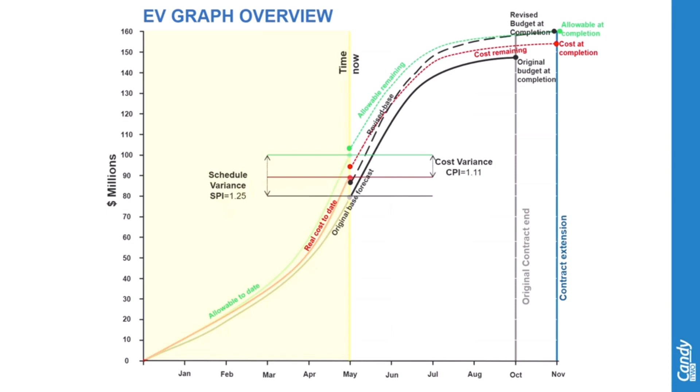To ensure that the required indicators and analysis information retain their integrity as a useful management tool, we must ensure that all sources of required information are checked and analyzed to ensure that they are at the required level of accuracy and that they run in parallel to eliminate time lag adjustments that compromise the information's integrity. In order for us to achieve the following earned value graph, we need to begin with establishing the base.

The original base forecast is the planned project value over the project duration. In order to plot the original base in Candy, we need to complete the following steps.

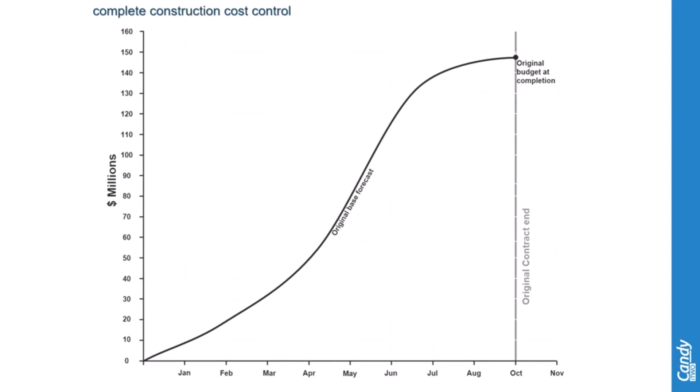Firstly, we are going to be discussing post-tender preparation and value re-engineering. This is the process of improving the value of a project by assessing each element of the project and the respective cost associated with the item.

The estimate created by the tender department in Candy Estimating can now be used for on-site project control. In this process, we are able to assess the estimate and adjust the rates to reflect the re-engineered, remodeled costs.

When we begin the post-tender and re-engineering process, there is a checklist that we look into. This is referred to as the post-tender checklist. The first step is to copy the job.

Once we have done that, we would then clean the job of unused items. We then can set the selling rates and preserve the bid rates and quantities. Once we have preserved the bid rates and quantities, we can begin to remodel the job so that we can reflect the current view of the project.

We can set our provisional final quantities and ensure that our resources and bill items have been allocated cost and task codes, before finally assessing our worksheets and resources through our reports by looking at the pricing check, worksheet calculation line check, provisional listing, and resource check. Let's begin to look at all of these steps in further detail.

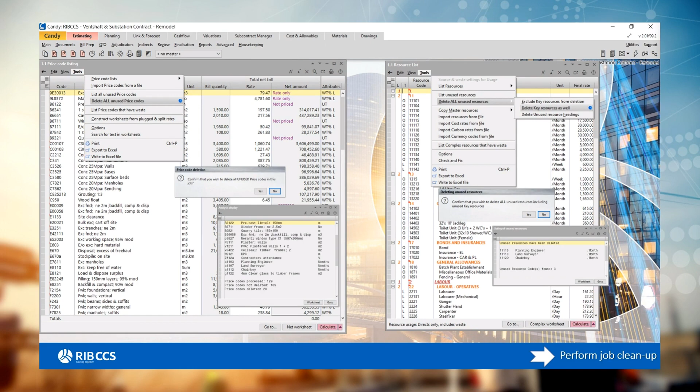Deleting unused price codes will result in having less price codes to check. The job will therefore only contain price codes used in the bill. To delete unused price codes, open the price code listing, select Tools, and delete all unused price codes, and select Yes to confirm. This will remove all price codes that have not been made use of in the bill.

Similarly, unused resources can also be deleted. This step can only be done after the unused price codes have been deleted, for the reason that price codes use resources, and therefore you cannot delete the resource while they are in use. To delete unused resources, open the resource list, select Tools, delete all unused resources, delete key resources as well, and select Yes to confirm. This will remove all resources that were not used in pricing the bill.

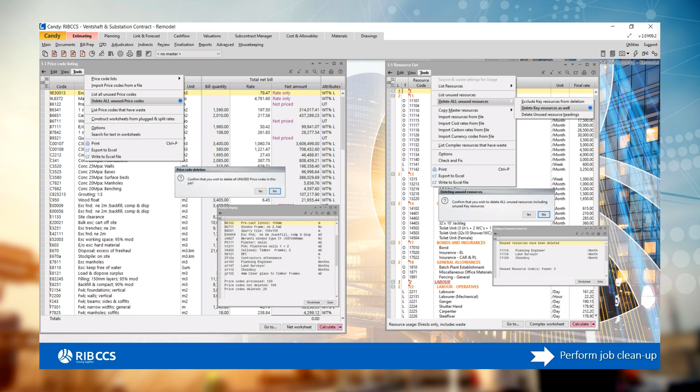The third check on the checklist is to copy the selling rate. The selling rate is used as the contractual rate for printing the interim payment claim to the client. The selling rates and amounts should balance with the signed tender document.

The gross rate is not ideal for post-tender stage because any changes made on the net rate through job remodeling will change the gross rate. Adjusting the net rate or applied markup will not affect the selling rates and is therefore ideal for post-tender stage.

The selling rate is entered manually or can be copied from the gross rate. A calculated markup column is available and calculates the difference between the selling and the net rate. At tender stage, the job was priced and the markup was applied. The selling rates can now be established by copying the gross rate prior to making any changes or remodeling.

To copy the selling rates, right-click in the selling rate column. Select Copy Selling Rates from Gross, tick to lock the selling rates after the copy, and select OK to confirm. This will copy the selling rates from gross and lock it from any changes.

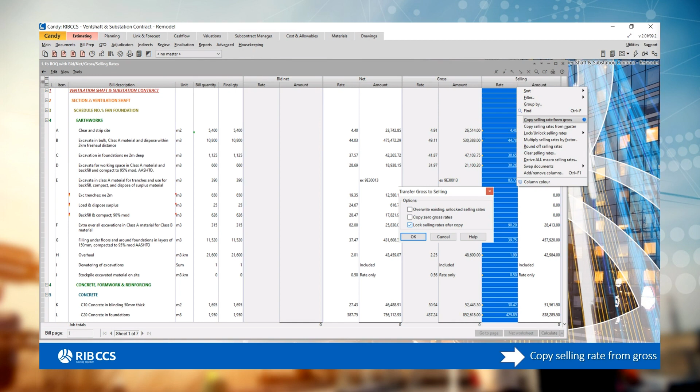The next step on our checklist is to preserve the bid rates and the quantities. A record of bid rates and quantities can be stored. These bid values can be used for comparison against remodeled rates and quantities. Once you have preserved the bid rates and quantities, you can change the net worksheets to reflect the current view of the project, also known as job remodeling.

To preserve the bid rates and quantities, right-click in the bid net rate column. Select Preserve all bid rates and quantities and click Yes to confirm. This will keep a record of the net rates and quantities as estimated.

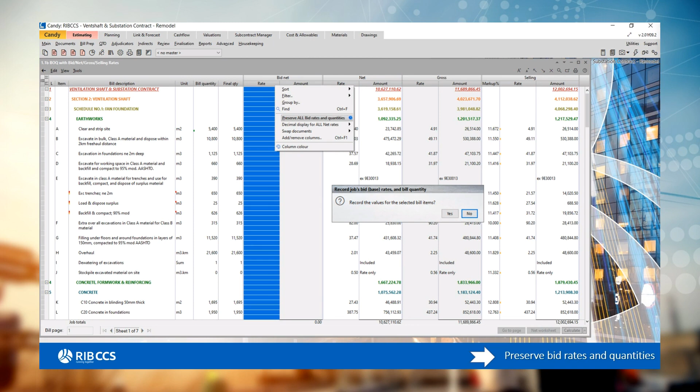Once we have set our selling rates and preserved our bid, we can begin to job remodel. Job remodeling is done by assessing each element of the project and the respective costs associated with it. The site team can now revisit each of the worksheets and adjust the productions to what they will achieve on site. Better buying, better subcontractor rates are considered, and the site team may agree on the production in the worksheets and revisit the construction methods used.

By doing this, the site team takes ownership of the project budget and can manage the productivity by using alternative construction methods for improved financial control on the project. On this job, we are able to see that item L, C20 concrete in foundations, is priced at 387.75 and a markup percentage of 12.76. The rate for river sand, which is used to price item L C20 concrete in foundations, is currently at 68 per meter cubed.

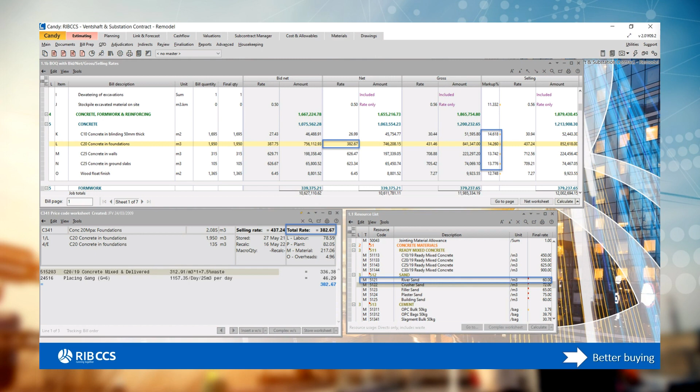To do this, simply open the resource list and change the rate for river sand by typing 60 in the final rate column. This has an effect on the net rate for item L, C20 concrete in foundations, decreasing the rate from 387.75 to 382.67, and a markup percentage increase from 12.76 to 14.26. Job remodeling allows us to manage the project budget and improve the financial control.

The next step on the checklist is to set final quantities. The bill quantity will normally be used for the first final value projection and as a starting point. It is best to do this before entering any valuation quantities. To copy final quantities, right-click in the final quantity column. Select Copy Final Quantities from Bill and select Yes to confirm.

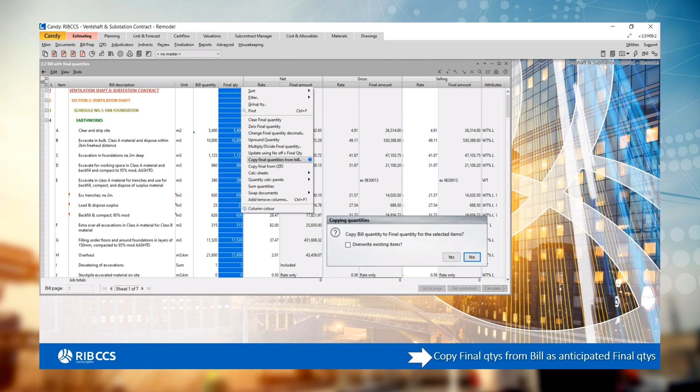The final quantities can be adjusted and recorded as they are remeasured. Once you have remeasured the final quantities, simply type the remeasured quantity into the final quantity column. For item A, clear and strip site, we have remeasured the final quantity to 6,000 square meters.

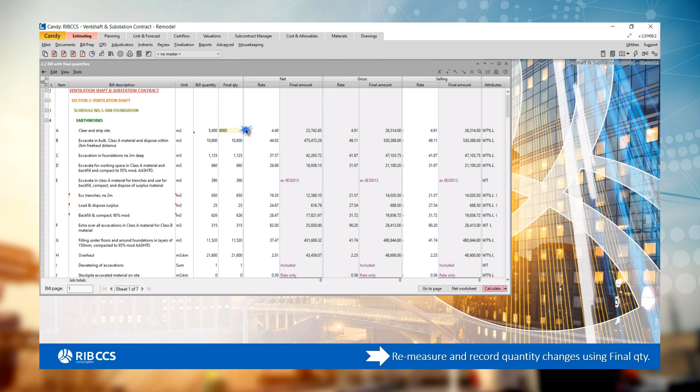Next, we can allocate cost codes. The cost code, also referred to as the ledger code, is used to summarize resources. The cost code provides resource-based control for managing fixed resources such as material. At post-tender stage, the allowable to date in Candy can be reconciled to the costs to date in accounts. It is therefore important to have the cost code in Candy matching the accounting ledger code.

Since complex resources are combinations of simple resources and complexes, we only allocate cost codes to simple resources. To allocate a cost code on the resource list, double-click in the cost code column in line with the resource you would like to allocate, and select the relevant cost code from the pop-up list. In this job, we are allocating cost code 910002 General Labor to resource 22602 Fitter Grade 2.

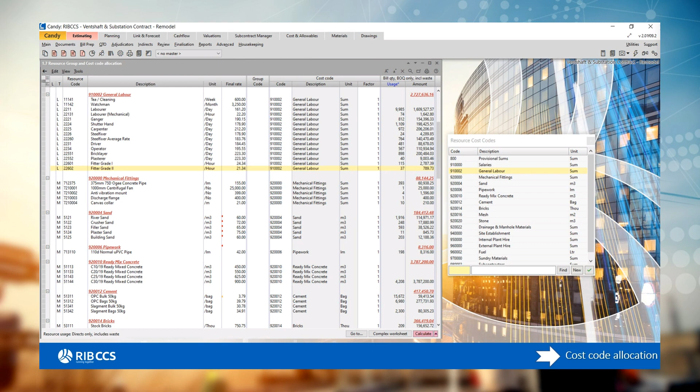Similarly, we can allocate task codes. Since the cost code provides limited control to productive resources such as plant and labor, the engineering site staff will require the labor and plant allowable in more detail, typically the allowable per task on site.

The task code is used to implement functional control on the job and summarizes bill items into categories of function or activity. The key is to summarize items with similar production. By summarizing items with similar production, we are summarizing items with similar resources and therefore similar cost sensitivity.

Candy provides a simple method of summarizing the bill items into tasks. The allowable for each bill item is broken down into the various resource types. So we immediately have the labor and plant allowable for each task, the exact information required to control the productive resource. If our machine is not being used effectively, it is costing a lot more than if our labor is not being productive. We would have different controls on our plant versus our labor.

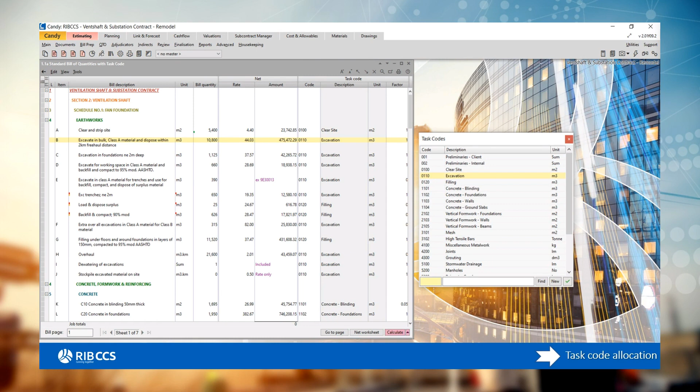To allocate a task code, on the bill, double-click in the task code column in line with the bill item you would like to allocate, and select the relevant task code from the pop-up list. In this job, we are allocating task code 0110 excavation to bill item B, excavate in bulk, class A material, and dispose within 2 kilometers free haul distance.

Now that we have completed the items on our checklist, there are further reports that could assist to ensure that we have correctly assessed our job. The first report is the pricing check. We are able to customize this report to view the codes we would like to search for, like items with 0 rates or items with no selling rate. For the purpose of post-tender, we are looking for items priced in plug and split rate mode.

To conduct this check, in the Estimating tab, click on Review, select Pricing Check, and select Price Codes on the Direct Cost Bill pages, and include codes priced in plug mode and priced in split mode. The report found no items in the job.

However, if an item was priced in either method, the report would identify this item and the page number, the item number, the code, the description, quantity, and rate, as well as a comment to identify if it was priced in plug or split mode, thus allowing you to quickly identify the items and correct them.

The next report is the worksheet calculation line check. In the Estimating tab, click on Review, select Worksheet Calculation Line Check, and click on OK to run the report. This job has found no errors on the worksheet calculation lines. However, this check will highlight potential errors found on the worksheet calculation lines, identifying errors with variables, typing errors using the letter O instead of the number 0, as well as errors in the syntax for percentage waste.

Another report check we can do is a resource percentage check on our key resources. This report allows us to see the utilization, rate, amount, and percentage usage per resource type, and the overall percentage usage on the project. In the Estimating Report Manager, select the report resource percentage, select final quantity, and sort by resource type and on simple resources only. Click on OK and preview the report.

We are able to see for material resource 51144 C30/19 ready mix concrete. This material resource constitutes 61.45% of the overall material usage on the project and 35.60% of the overall resource on the project.

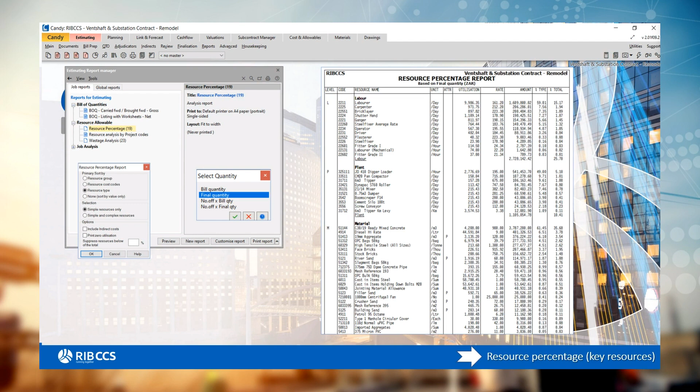Now that we have completed our post-tender checklist, we can start looking at the contractual program. A contractual program helps with the coordination of the activities to be completed in order to successfully complete a project. Candy's planning application, also known as SitePlan, is much more than just a scheduling system for drawing programs. It is a simple yet powerful critical path networking and project control system designed for construction projects. It can be used effectively by a non-planner, but has all the features, functionality, and sophistication required by a professional.

The first step is to create a project program. As a contract may consist of many programs, sub-programs, and section programs, the program manager is used to create, structure, and manage your programs easily. To create a program, click on the Program Manager and select New. In this job, we have created the program called Contractual Program. Double-click to select it.

Once we have selected our program, we can define the calendar. Calendars are used to store daily information and to specify non-working days and working day patterns for the project. In the calendar setup, we are able to add notes on a daily notepad as well as the daily diary. A total of 9 calendars may be created in SitePlan. This means that if you have a 6D or 6-day calendar, you can allocate the calendar to an activity that works 6 days. The program calendar can be viewed in a daily, monthly, and yearly view.

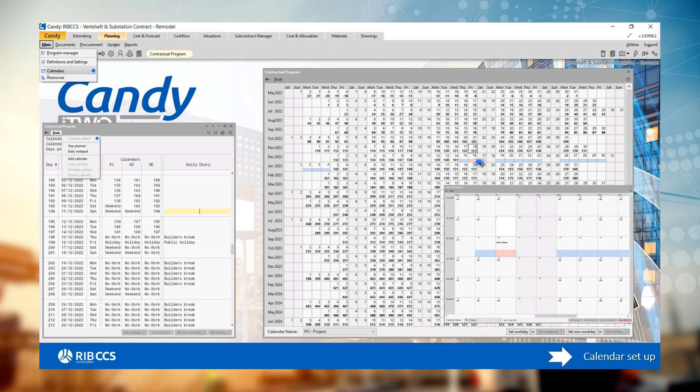Once we have defined our calendar, we can open our standard bar chart. This document has been customized to view the activity information, duration of the activity, as well as the successor details. The right-hand side of the document is where our bar chart information will be displayed. Since this is a program we are creating from scratch, we need to fill out the activity descriptions based on the activities we are planning to complete for the project to be a success.

We are able to add activities simply by typing in the description of the activity into the description column. We can add headings and subheadings to summarize activities in a work breakdown structure by simply adding the heading level number in the T column. In this program, the fan foundation is the main heading with subheadings Earthworks, Foundations, Superstructure, Stormwater Drainage, and Fan Installation. Each subheading is broken down into the individual activities required to be completed. These activities can now be allocated a duration and linked based on their precedence network.

To allocate duration to an activity, we can simply type in the duration column or use our mouse pointer in the bar chart window and drag a bar to the desired duration. For this project, we are able to see that Clear Site has a duration of 20 days, and the fan base walls in the superstructure is being allocated a duration of 30 days.

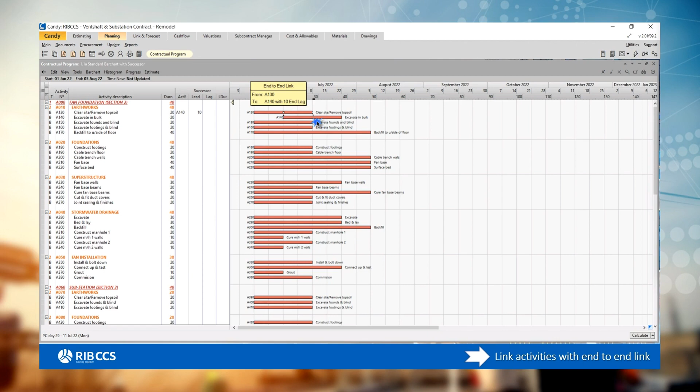Activities can also be linked using the successor columns. This is done by typing in the successor activity number into the current activity number column. Here, we can see the successor activity number A150, Excavate in Founds and Blind, is entered into the current activity number column, A140, which is Excavate in Bulk. We are then able to allocate the lead and lag, respectively.

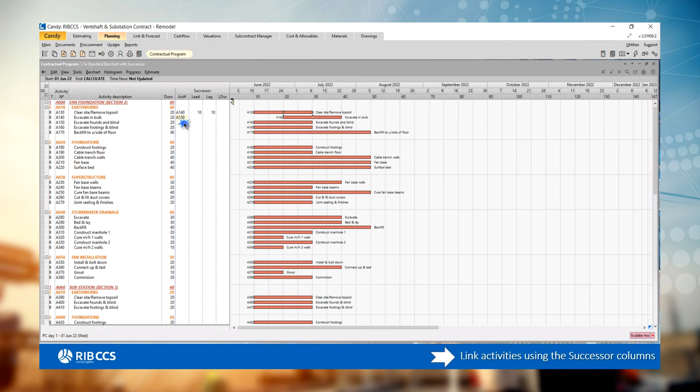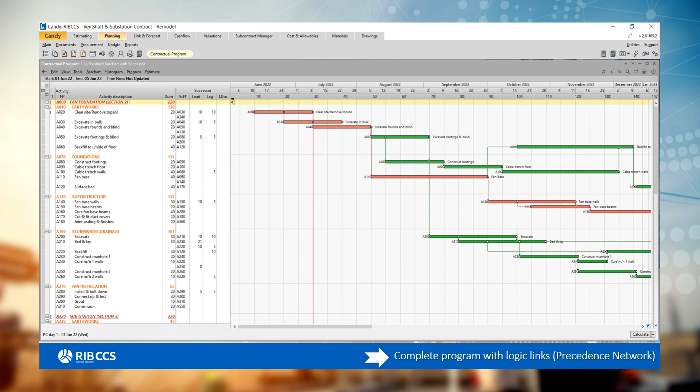Once you have completed linking the activities based on your preferred method, we are able to view our project program fully linked. The red bars indicate activities on the critical path, and green bars indicate activities with float. The program is now complete. However, in addition under planning, we have items such as long lead and information schedules. We can add a legend to be viewed on the bar chart. We can add timelines to indicate our seasons, as well as add imposed dates such as the contractual end date.

Once we have set our contractual program, and in order for us to analyze and manage the expected cost of the project, we need to link the bill to the program. We have created our bill, completed our remodeling as well as the post-tender checks. We have created our program from scratch and established the relationship between the activities. We are now able to move on to linking the bill of quantities and the program. When it comes to linking the estimate and the program, there are three methods of linking the BOQ to the program in Candy.

Method number 1, creating a program from the estimate. In this instance, we don't have a project program and only have a bill of quantities. We can then create the program from the bill. The advantage of using this method is that it is a quick and fairly accurate budget forecast, which is done by the estimator. Bill items are automatically linked to activities, and it is suited for civil work bills that are more activity-based. In order to link the bill to the program using this method, we take the following steps.

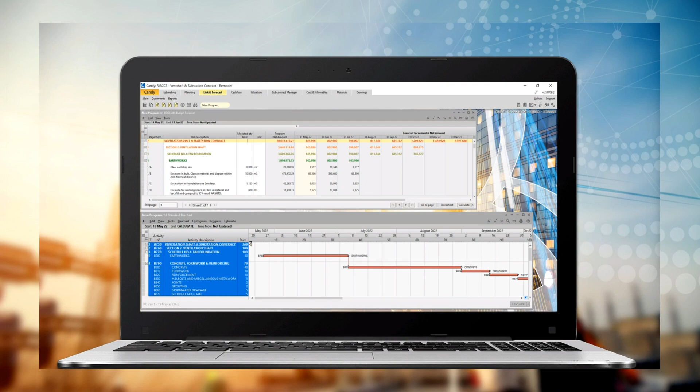Now, we are able to see our budget forecast for each bill item for each month of the project's duration. We are able to see at the very top that we have a budget forecast of 145,996 for May, 803,980 for June, and so on. We are also able to see it broken down to each bill item to see the budget forecast on the specific bill item spread over its duration.

Method 2. Linking the estimate items to the program activities. In this instance, we have a bill of quantities completed as well as a program which was manually developed. The advantages of this method are it produces the most accurate budget forecast, bill items contribute both monetary and resource values on the budget forecast, and program activities contribute duration and sequence of the budget forecast. This method is easy but is very time consuming. To link the bill to the program using this method, we take the following steps.

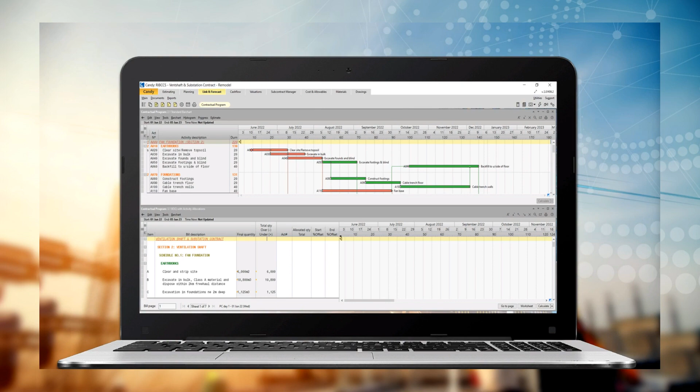We can now access our bill of quantities with activity allocation under the Link and Forecast tab. We can size the forecast document to the bottom of the screen and the project program to the top. The bill of quantities with activity allocation document is simply a BOQ with a bar chart window as well. We can now begin to manually link the bill of quantities and the program.

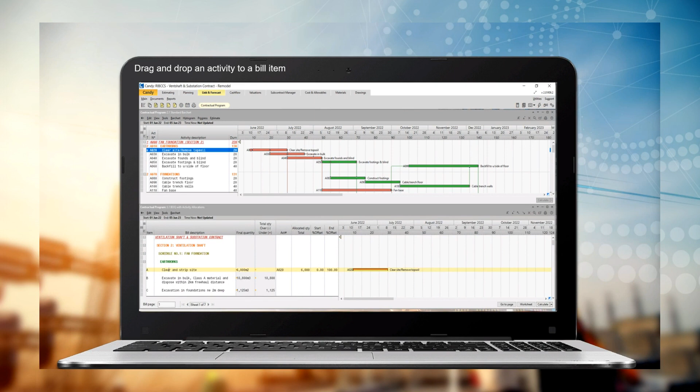The first way to link activities and bill items is by dragging and dropping an activity to a bill item. On the standard bar chart document, select the activity Clear Site, Remove Topsoil, and drag it to the bill item Clear and Strip Site. Once your cursor is green and indicates a valid drop position, you can drop the activity onto the bill item. This will now link the activity to the bill item, showing the final quantity, activity number, allocated quantity total, with the default start and end offset of 0 and 100 respectively.

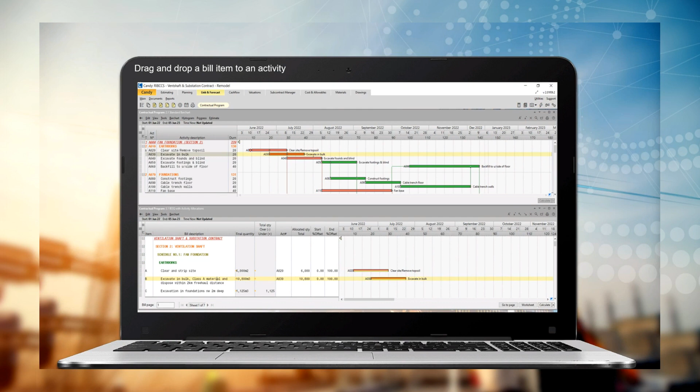Similarly, we can do the inverse of the previous process, this time by dragging and dropping a bill item to an activity. On the bill of quantities with activity allocation document, select the bill item Excavate in Bulk, Class A material, and dispose within 2 km free haul distance, and drag it to the activity Excavate in Bulk. Once your cursor is green and indicates a valid drop position, you can drop the bill item onto the activity. This will now link the bill item to the activity, showing the final quantity, activity number, allocated quantity total with the default start and end offset of 0 and 100 respectively.

When linking the bill and the program, we can also link the activities and bill items in a one-to-many relationship. Once again, we could link them in either way, meaning we could link multiple bill items to an activity or multiple activities to a bill item. On the standard bar chart document, select the activities Excavate Founds and Blind, as well as Excavate Footing and Blind. Drag both activities to the bill item Excavate in Foundations not exceeding 2 meters deep. Once your cursor is green and indicates a valid drop position, you can drop the activities onto the bill item.

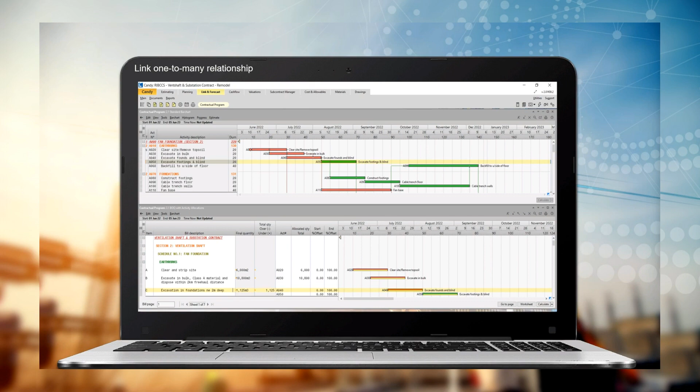You can now see that both activity A040 and activity A050 have been linked to the bill item. A measurement would have to be done in order to split the final quantity of 1125 meters cubed between the two linked activities. The start and end offset percentage may be used for a more accurate representation of when the works will happen, thus only allocating the money, quantity, and resources over the adjusted offset. This is useful when the program is not detailed enough to break down the program activities.

Once we have completely linked our bill of quantities to the program, we can then access the bill of quantities with budget allocation document from the Link and Forecast tab and generate a more accurate forecast based on the bill and the program.

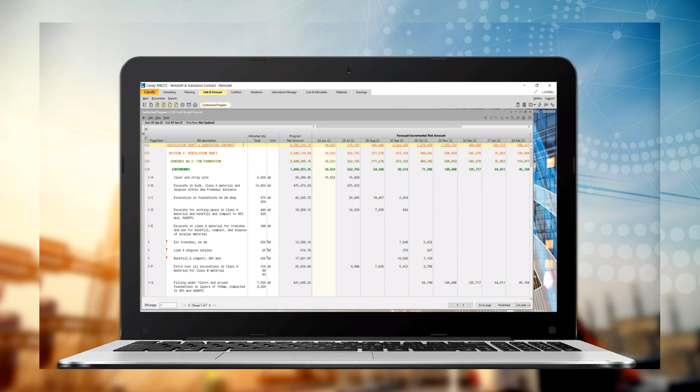Method number 3, creating an estimate from the program. This is similar to method 1. However, in this instance, we don't have a bill of quantities, but we have a project program. We can then create the bill from the program. This scenario is much less likely, however it is possible in Candy.

The advantages of this method are the bill of quantities can be priced and abstracted from a program. Activities are automatically linked to the abstracted bill items, and it is suited for design and build projects. Like method 1, by creating a bill from the program, this will automatically create a dynamic link between the activities and the bill items, and hence will not need to be manually linked.

In this job, we have a master document in place and can use the master to price the bill items that are created from the program.

To allocate a bill item to an activity, double-click in the code column under Candy pricing. This will bring up the master price code list. Select the correct price code from the master price list, in this instance, site clearance, and double-click to select the price code. This will populate the Candy pricing code, description, unit, and rate.

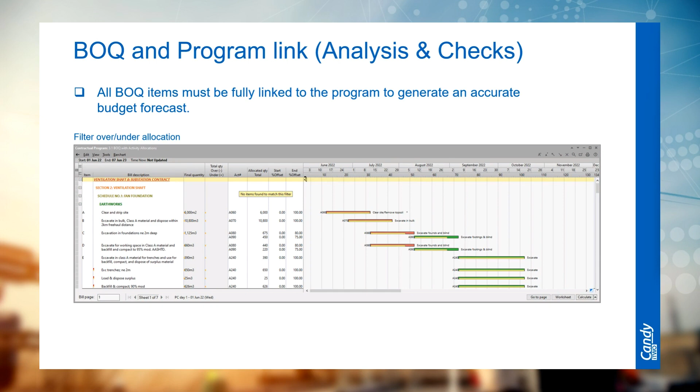In this job, we have found no items to match the filter. However, this check will identify all the bill items that have allocated quantities that do not match or add up to the final quantity. You can then make the adjustments to ensure that the correct quantity has been allocated.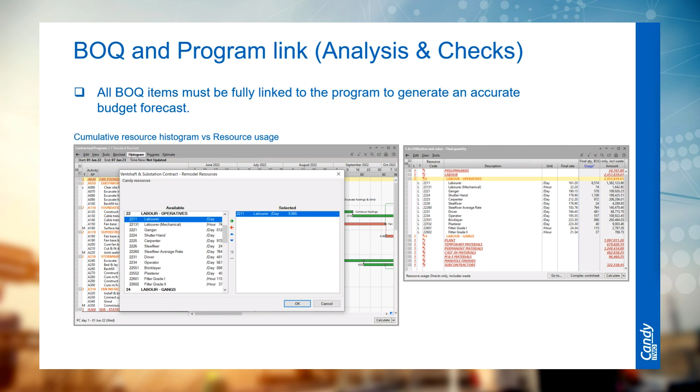To view the cumulative histogram on the standard bar chart window, click on Histogram and select Estimate Resources. This will bring up a selection box for the resources. For this check, we will select resource 2211, labor, by double-clicking on it and click on OK.

To plot the graph cumulatively, click on Histogram, Histogram Options, and select the plotting style to plot cumulative values. This will then plot the graph cumulatively. By hovering the cursor above the plotted graph, the maximum cumulative value in the bottom left-hand corner of the standard bar chart should match the resource usage amount on the resource list document on the right.

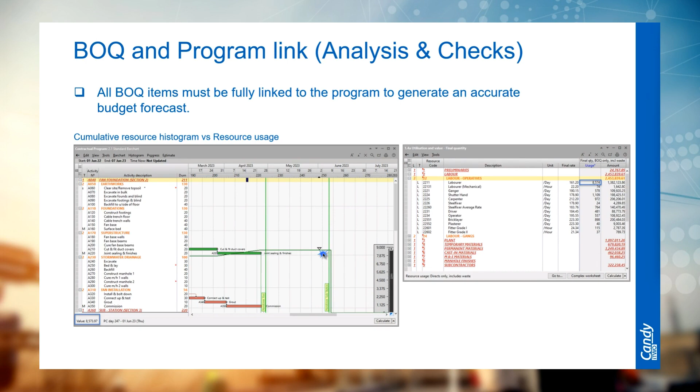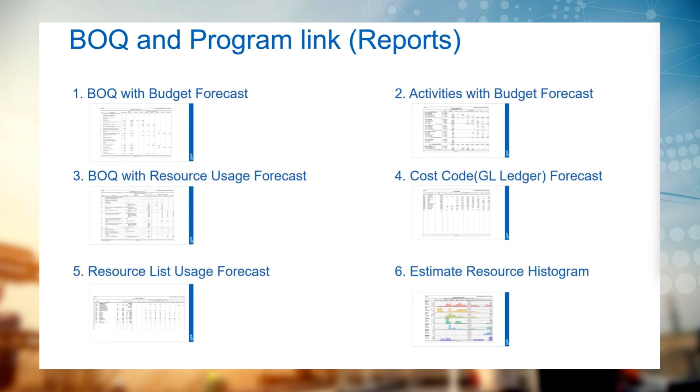Now that we have completely linked the program and the bill, we are able to report on our project. The BOQ with Budget Forecast report shows the money spread over time for each bill item based on their net amounts.

Similarly, the Activities with Budget Forecast report shows the money spread over time for each activity on the program based on their net amounts.

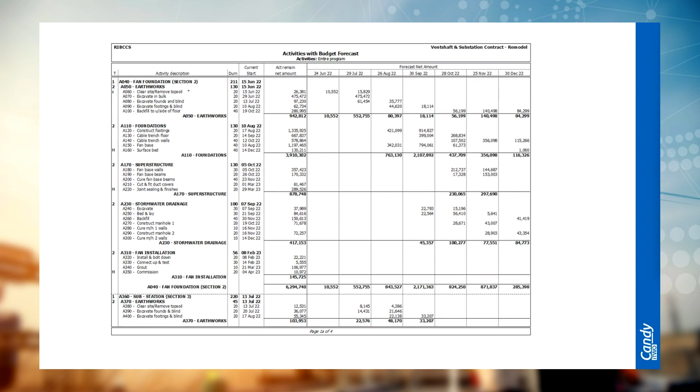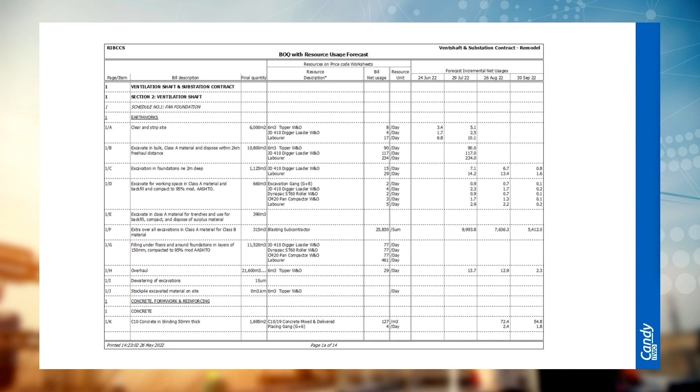The BOQ with Resource Usage report shows the net usage of each resource broken down for each bill item.

The Cost Code Forecast report shows the money spread over time for each ledger code based on their net allowables.

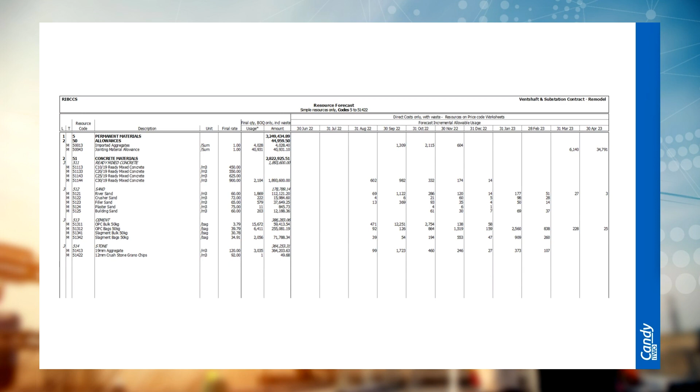The Resource List Usage Forecast shows the forecasted usage of each resource on the resource list. Here, we can see that for the month of August, we have a usage of 471 bags of OPC bulk 50 kg cement bags, and so on.

Finally, we have the Estimate Resource Histogram showing the daily values in the bar graph and cumulative values in the line graph of each resource type.

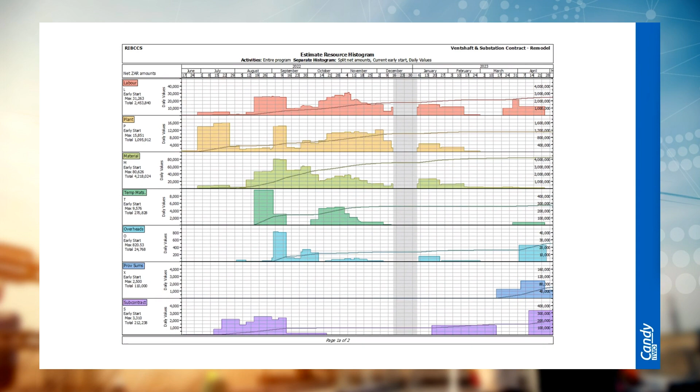Now that we have linked the program to the bill, we can now store the base of the linked BOQ and program as a guide to measure against our actuals and costs going forward.

In order to store the base, under the Link and Forecast tab, select Main, select Cost and Allowables, and cost and allowable settings. In the cost and allowable settings, under the Options tab, we select that all bill items and all VOs are chosen.

Next, under the Forecast tab, we need to select the program that is linked to the bill of quantities. In this instance, the program is called the contractual program. We then can select the Financial Calendar button to set up the financial calendar.

The financial calendar allows us to round our forecast based on our close of cost date. We are able to adjust the contract duration and set the calendar period. For this job, we will select the last working day of the month. Click on OK.

This will bring up the financial calendar document showing you your project periods based on your program, project duration, and close of cost dates.

Once we have set up the financial calendar, under the Link and Forecast tab, open the Link and Forecast Document Manager. Select the tab Financial Forecast and select the document Bill with Quantity Forecast.

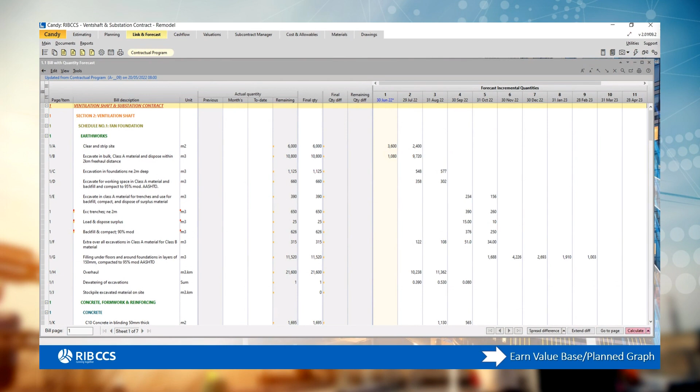To import a forecast from a program, click on Tools and select Import Forecast from a program. Select the program. In this instance, it is the contractual program. This will then populate the forecasted quantities for each item.

Once we have imported the linked bill of quantities and program into the earned value, we can store our base. To store the base, click on Main, select Cost and Allowables, and select Store Allowables Base. A pop-up will then appear to inform you that the base has been recorded.

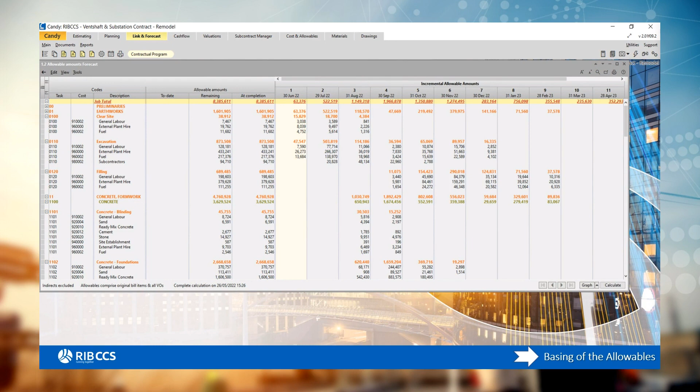Once we have done that, we can look at our allowable amount forecast. In the Link and Forecast Document Manager, select the Financial Forecast tab and select Allowable Amount Forecast. This then shows the allowable amount based on the cost and task code and can then be plotted onto the earned value.

In order to view the earned value graph, click on the Graph button in the bottom right hand of the document.

This now plots the earned value graph, and by looking at the data values, we can see the planned value shows the planned project value over the project duration. Earned value and actual costs are currently the same as the planned value, as we have not made any progress or incurred any costs as yet.

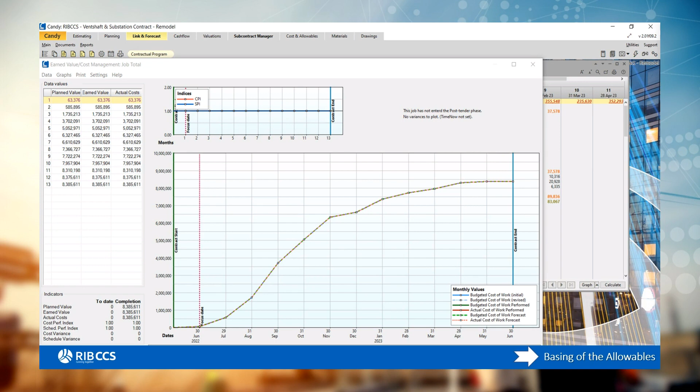So please join us on day 2, where we will cover how the allowable to date is established. I thank you very much for your time, and back to you, Evelio.